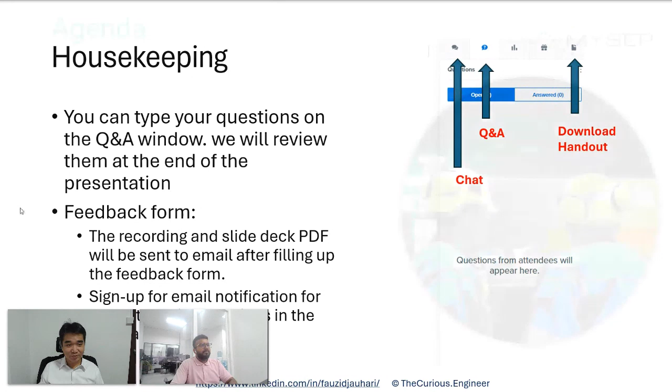Okay. All right. So today's agenda: I will start with a little bit of how you model a separator in HYSYS. Then I will hand over the hard part, the important part, to Avinash.

He will start with talking about the value of rigorous separator modeling using MySep, and how it works, and what you can actually do with the tools, MySep Studio and MySep Engine. So we will demonstrate two workflows.

One is the workflow using MySep Studio by Avinash. So Avinash will demonstrate that part. Then he will pass the file and hand it over to me to show you how to take Avinash's work, the separator information he has done in MySep Studio, and incorporate it in HYSYS. So this is our agenda for tonight.

All right, so this is very brief. In the separator model in HYSYS, you can do a carryover. By default, the carryover model is none, which means it's ideal separation. There's no liquid getting carried in the gas phase. There's no heavy liquid in the light liquid phase carryover and vice versa.

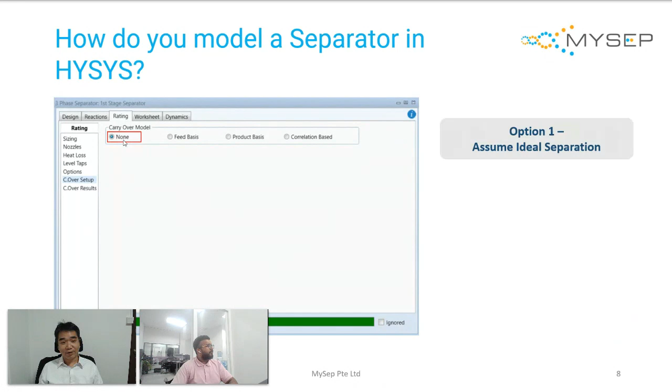So this is the first option. The second option is basically we specify using fractions, how much of the feed is getting carried over. We can use either feed basis or product basis. So this is more for material balance purposes.

This is not predictive. The split or the fractions remain constant regardless of whether the operating conditions change or the flow rate changes. It will not change these fractions. So that's option two.

And option three is basically correlation-based carryover calculations. HYSYS has a few built in. Tonight we're going to talk more about the correlations from MySep.

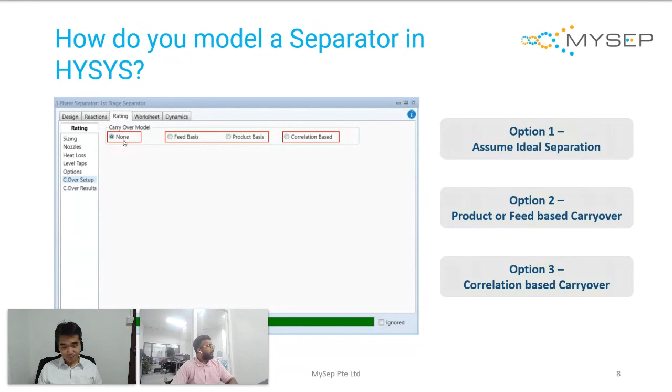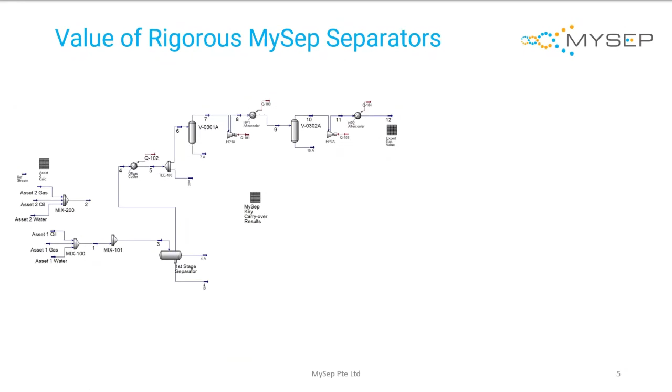All right. So I will hand it over to Avinash. I will stop sharing and take off my video. Cool. Let's get this into presentation mode. Okay. Fauzi, can you confirm if you can see my screen? Fauzi, can you hear me? Yes, I can see your screen. Okay, perfect. Just wanted to make sure everything's okay.

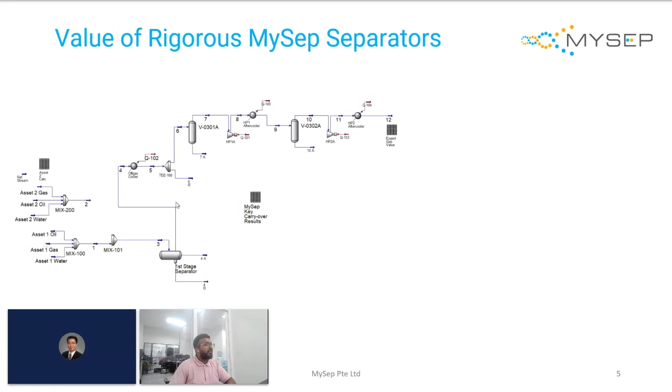Cool. Just picking up from where Fauzi left off. One of the areas where you can use MySep within HYSYS is by integrating the rigorous MySep models within HYSYS. But before we go into the actual workflow, I'd like to explain what rigorous MySep separators are and what they do before we look into the demo itself. Let me just get my laser pointer.

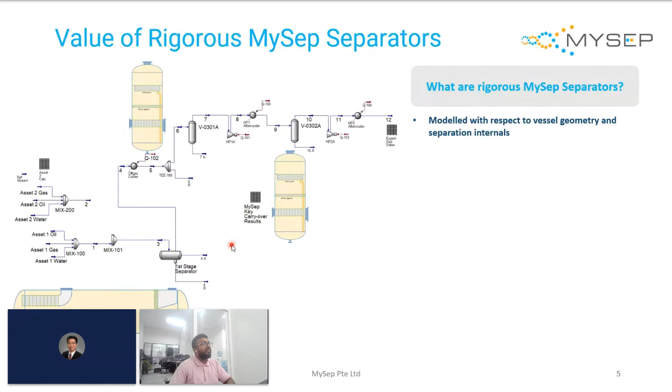This diagram depicts what a rigorous separator would look like. What MySep Studio produces as an output is separation performance. This includes gas-liquid, liquid-liquid, and liquid-solid separation performance. So the MySep software predicts liquid carryover with your gas stream, water and oil content, as well as sand separation.

And as Fauzi mentioned before, the models that we build within the MySep Studio environment can be integrated within HYSYS. This brings the rigorous gas-liquid separation that we have within MySep Studio into the HYSYS flowsheet simulation. So that's a very brief background of what rigorous MySep separators are and what they do.

What would be more interesting to you is what you can now do with this integration. First and foremost, the MySep Engine integration makes your flowsheet simulation more rigorous and more representative of what you see in the field, because ideal separation is far from reality. So having MySep there helps you bridge the gap between what you see in the field and what you see within the simulation environment.

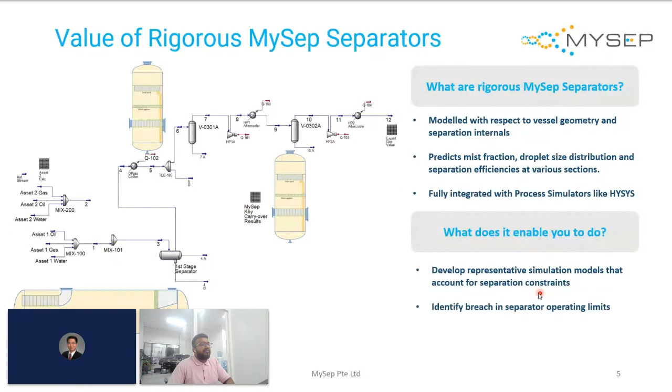So it makes it much more representative. Second is that it does not only bring the gas-liquid separation performance into the flow sheet, but it also tells you what are the limits within your separator. So if you're changing operating conditions, MySep will actively flag what kind of limits are being breached with respect to the separator. So this could be very simple things like inlet momentums, velocities, or it could be things that are very much concerned with the performance of the separator itself. So it will flag things like breaching the demisting device's K-value and things like that. So it will give you an idea whether you're within the safe operating limits or not.

So what can you do with these much more rigorous models? I think it adds way more confidence when you're doing troubleshooting and root cause failure analysis. Once you have a representative model, it becomes much easier for you to do a detailed root cause failure analysis. You can understand whether the performance degradation within your compressors is caused by malfunctioning separators. You can identify whether foaming in your contactors is caused by liquid carryover from upstream separators. So it helps your troubleshooting and root cause failure analysis.

Second, it also helps you do debottlenecking or throughput increase assessments. So this is very useful because with the MySep engine integration, you can understand what are the limits and what are the potential effects to your overall flow sheet when these limits are being reached. And we also see clients using MySep more proactively for things like performance monitoring. So they plot operating envelopes through this integration. And we also see clients linking plant data to actively trend liquid carryover parameters where it may be of interest. So these are just some examples of how MySep is being used and how the integration with HYSYS is adding value to our clients.

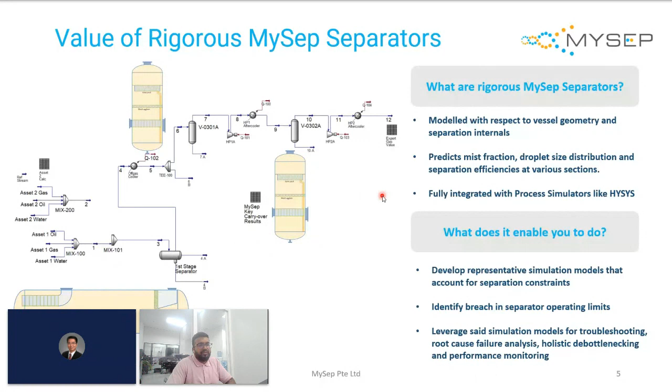So in the first bit, we've spoken a little bit about what MySep rigorous separators are, and how they add value to the overall flowsheet simulation. In the next slide, I'm just going to give you a little bit of an idea of how MySep does the performance prediction. I think this is maybe of interest to all of you. MySep works on a proprietary modeling approach. We call this the MySep incremental modeling. I thought it would be best to explain this to you with an example.

So I have a sample separator here. This is a typical three-phase production separator that you would see in an upstream facility. So I have my upstream piping, I have my inlet device. In this case, I have a vane type inlet device. I have a demisting device here. It's a vane pack demisting device, and I have distribution baffles on my liquid side.

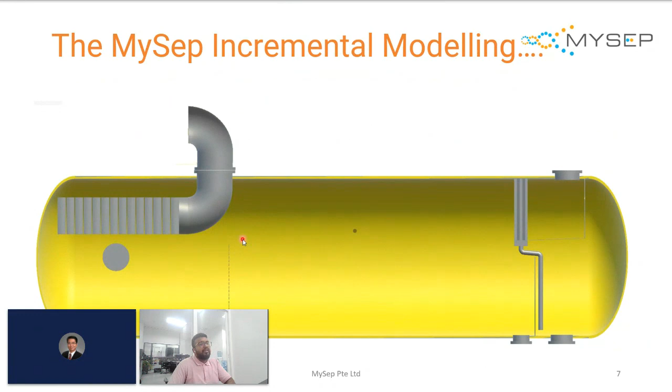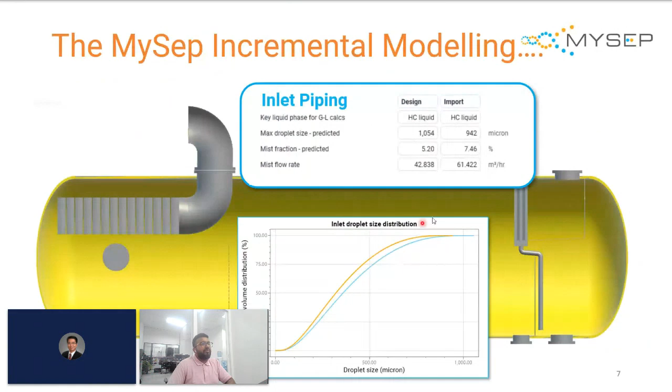So how MySep makes the performance predictions is that it first starts at the inlet piping. MySep will take a look at what goes on within the inlet piping, and it will actively quantify two parameters: the droplet sizes that you're getting into your vessel, and also the amount of liquid that you're entraining in the form of mist. So droplet size distribution and mist fraction is a prediction that MySep makes. This is very important because this determines how easy or how difficult your separation problem is going to be. So that's what MySep defines as a start point within your vessel. This is the first prediction that we get within the MySep environment.

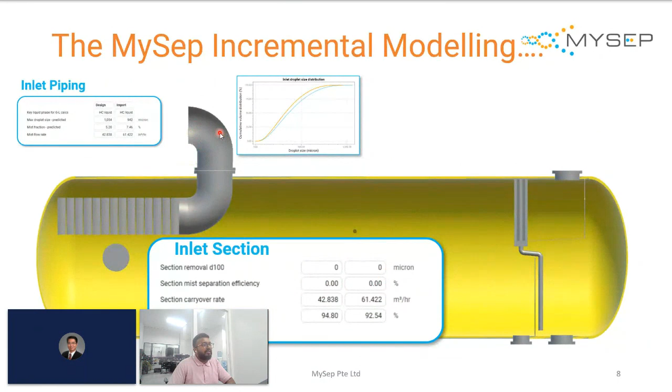And then it takes a look at what goes on within your inlet section. Depending on the type of inlet device that you select, MySep will quantify a mist removal efficiency. In this case, a vane type inlet device does not contribute much to mist separation. So you see that your mist separation is zero. So all of the mist that you generated within the inlet piping will be sent to your gravity section.

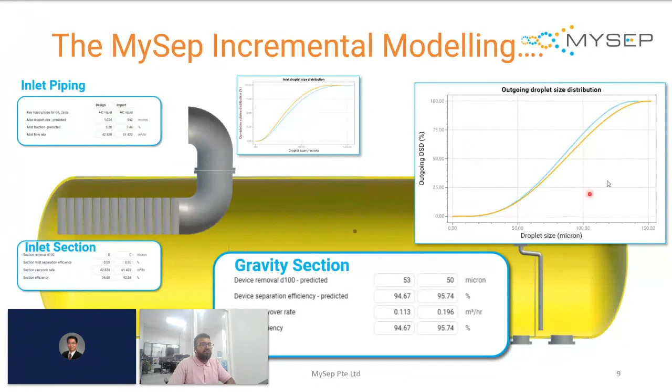So at your gravity section, we'll do another performance computation to figure out what are the droplets that are going to be separated by gravity and what are going to remain entrained to the next stage. So here we'll again define what is the outgoing droplet size distribution. This outgoing droplet size distribution will then serve as an input for your demisting device. So again, iteratively in the demisting section, we will quantify, based on the definition of your demisting device, what are the mist droplets that can be removed.

So I think to put more context to this, what we were getting in were roughly in the range of 1000 microns. In our gravity sections, we were capable of removing droplets of 150 microns or bigger. So anything smaller than 150 microns was carried over to your demisting section. At the demisting section, we were capable of removing droplets of 50 microns.

So in a nutshell, what I wanted to explain is that what MySep does is that it takes a look at each section of the vessel in detail and then incrementally quantifies what is being removed at each section before quantifying the overall separation performance. So that's what MySep does to predict gas liquid separation performance. It does something similar for the liquid liquid bit as well.

So this is just to give you an idea of how MySep works. And I think you will see this once we go into the demonstration itself, and we can take a look at that in further detail.

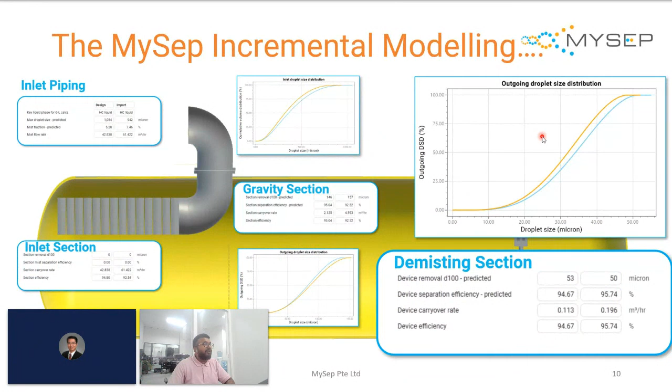So before we jump into the demo itself, like what Fauzi mentioned, we're going to be looking at two things. The first workflow is going to be taking a look at individual separators within the MySep Studio software. And the second approach is going to be taking a look at integrating the various models into HYSYS. So I thought it'd be a good idea to give you an idea of what each of the individual models do so that you have a clearer picture once we go into the demo.

So the first application is called MySep Studio. What you can do within the MySep Studio application is that you can rate and design individual separators. So it lets you take a look at all the detailed sections within the vessel, and it will quantify the vessel performance as what we saw earlier. So in the area of designing a vessel, it has a lot more features. It helps you do automatic vessel sizing. It also computes the vessel weight within the software environment.

If you're on a floating facility, it has capability to quantify motion effects. And if you're integrating into more brownfield operations, it produces an operating envelope. So it tells you at which range, which operating point you'll be suffering from carryover. So it plots the carryover curves. And it also has a lot of other features that help design as well as brownfield works, such as data sheet and report generation. So that's what MySep Studio does.

It helps you build the geometry, it helps you design as well as rate separators that are existing in the field. And it also has bidirectional linking to most of the leading simulators as well as HYSYS. So if you have a separator that you'd like to model, you can pull in the process data into MySep. You can do the performance computations within the MySep environment, and you can write the results back into your flowsheet. So that's what MySep Studio is capable of doing with regards to simulator communications. I'll demonstrate that to you when we go through the demo.

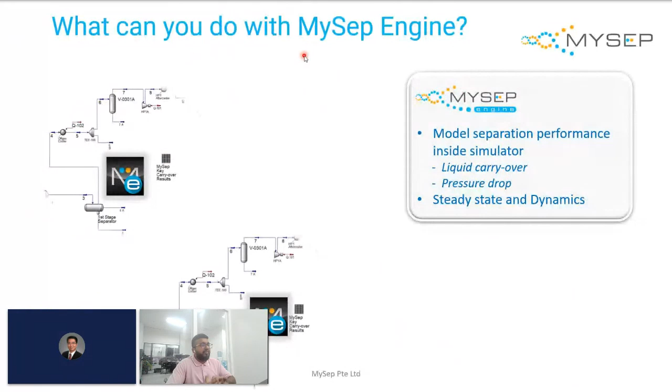But in a nutshell, what you need to remember is that the MySep Studio application is where you model the separator in detail. The second application is called MySep Engine. MySep Engine is pretty much a runtime. And what this runtime engine lets you do is integrate the rigorous model that you built in Studio within the HYSYS simulation environment. So it brings the rigorous gas liquid performance computations within the HYSYS environment.

And whenever you make a change within the HYSYS environment, the separator object no longer uses, like what Fauzi mentioned earlier, the ideal separation or carryover based specification, but it uses the correlations that MySep has built. So this works on both steady state as well as dynamic mode. So that is with respect to MySep Studio and MySep Engine and what they do. I think it'll give you a clearer picture once we go into the demo itself.

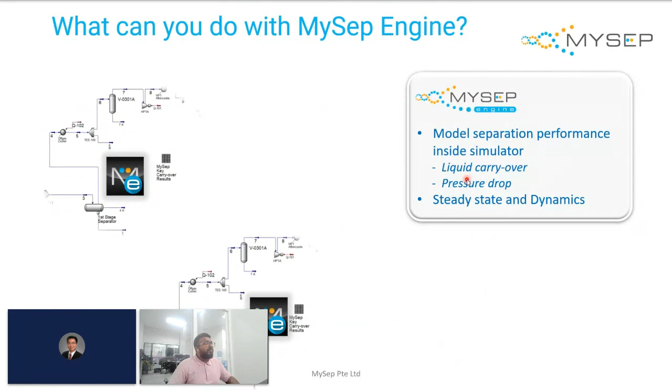So yeah, let's look at the interesting part, the workflow itself. Let me launch my simulations.

Okay, I'll minimize this. Okay. Fauzi, can you just confirm if you can see my HYSYS screen, if everything is coming through well? Yeah, I can see that.

Cool. Okay, in this case, what we're going to be looking at is an existing production facility. What I have here is a typical upstream production facility. I have two assets flowing. I have one asset, one group of wells connected to my facility. One is not. And within this model, what I have is a three-phase production separator.

I call it my first stage separator. I've truncated the condensate as well as the water stabilization system. And what you're seeing here is the gas compression system. So within the gas compression system, I have two suction scrubbers.

So on the first bit, we're going to be looking at modeling the separators rigorously within the MySep Studio application. I'll most likely show you how we'll analyze one of the separators. And on the second bit, we'll take a look at the workflow of having the separators that we've built within Studio integrated within HYSYS. This is where Fauzi would talk to you a little bit more about that integration.

So let me just pull up my MySep Studio application. So this is how MySep Studio looks. Within this MySep Studio model, I have three separators like what we saw earlier. I have my first stage separator, which is a vessel that looks like this.

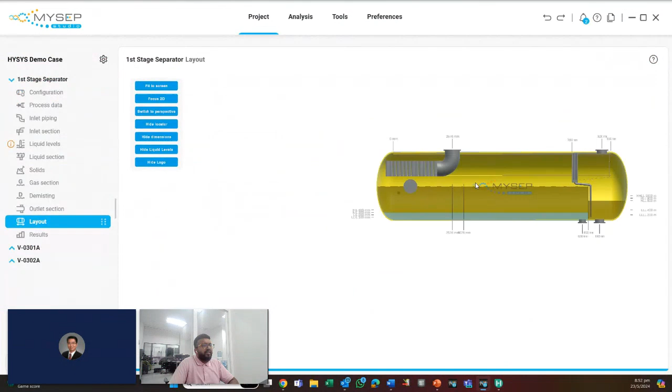What I have within my first stage separator is a vessel that is 9.5 meters in length, 2.8 meters in diameter. It has a vane type inlet device, a vane pack demister, and two distribution baffles on my liquid side. So this is the definition of my first stage separator.

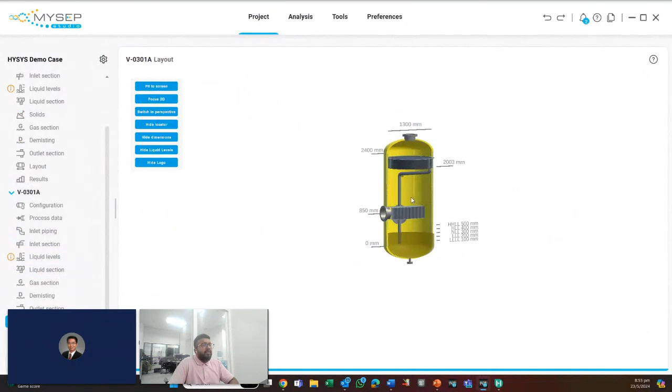Let's just have a quick look at my first stage scrubber. This is how my first stage scrubber looks. I have a vane type inlet device and a vane pack demisting device. And this is how my second stage scrubber looks. It shares a very similar configuration; it just varies in terms of dimensions. So this also has a vane type inlet device and a vane pack demisting device.

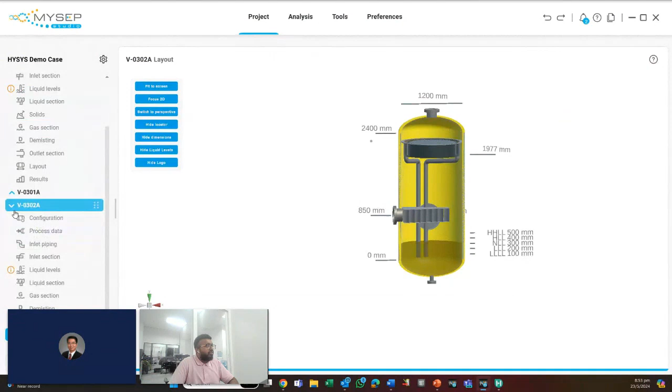What I'm going to do is just walk you through one of the separators. I think the best case would be the production separator, so let's go through that in detail. This is a model that I've already built. I'll walk you through very briefly the model construction methodology, then we'll take a look at the analysis itself.

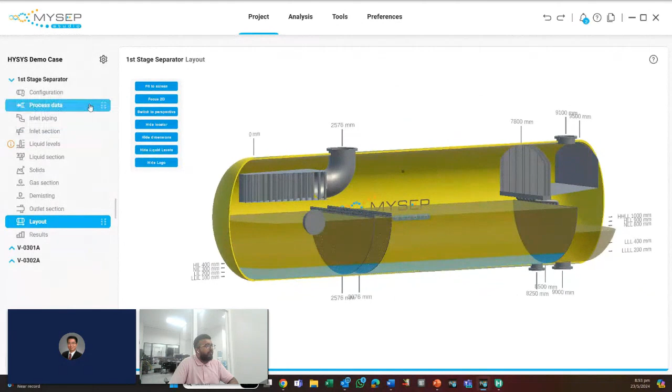For me to reach this point of having this model, I have to go through a couple of steps. Typically, I'll start at the configuration. This is where I define the geometry of the vessel. I choose whether it's a horizontal or vertical vessel, what type of separation it has, whether it's a two-phase or a three-phase separator. In this case, it's a three-phase separator.

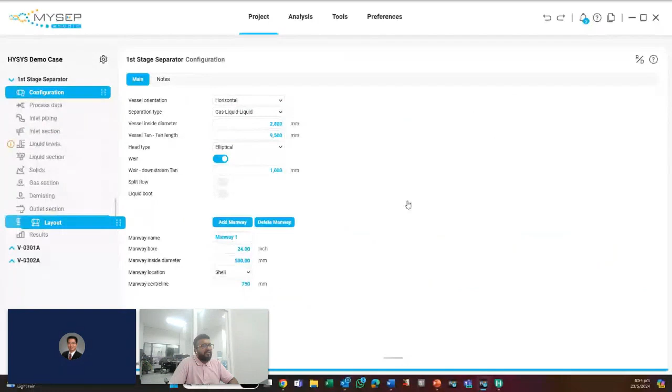I define my vessel dimensions, my diameter and my length, the head type, whether it has a weir, and other configurations such as split flow or liquid boot. Once I go through this, I'll get a definition of my vessel shell. So that is defined, and then I will look into the rest of the sections.

I'll take a look at my inlet piping definition. This is where I define my pipe size and my pipe area. These two parameters are quite important because they impact your droplet size distribution and mist fraction.

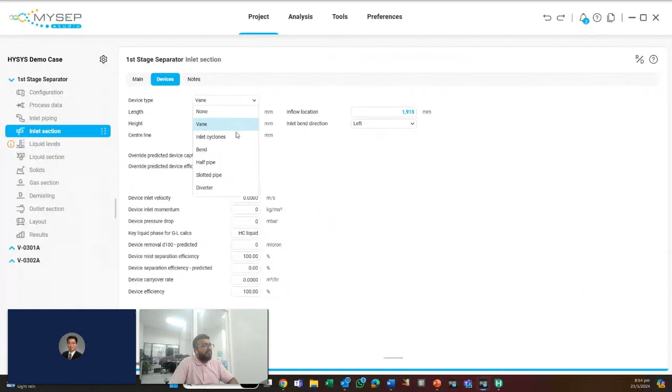At my inlet section is where I select my inlet devices. In this case, I have a vane type inlet device. But in MySep, you can also model different types of inlet devices. You can model cyclones, vanes, half pipes, slotted pipes, or diverters. So all of these are available. This is where I define more details with regards to my inlet device.

Liquid levels is where I specify my set points. In this case, because it's a rating exercise, I've already specified my set points, and MySep will calculate the residence times and the volumes based on the set points that I've defined.

Liquid section is where I define my distribution baffles. If you remember from before, I had two distribution baffles. This is where I specify them, and these are all the parameters in regards to the baffles. I'm going to skip solids.

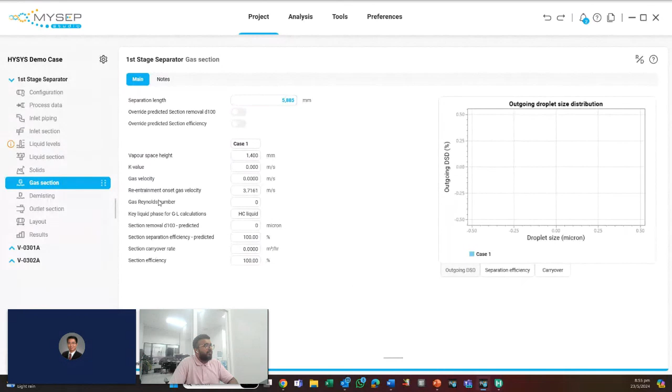Gas section is where I specify my separation length. This impacts the separation performance calculation. So this is something that you need to specify, or if you're in a design case, MySep calculates this for you. And finally, the demisting device, this is where you select whether you have a mesh pad, vane pack, or cyclone. These are the types of things MySep can model.

So once you go through this iterative process, what you'll get is a vessel that looks like this with respect to the internals configuration. So this is a rating workflow. If you're doing a design workflow, it's a bit different.

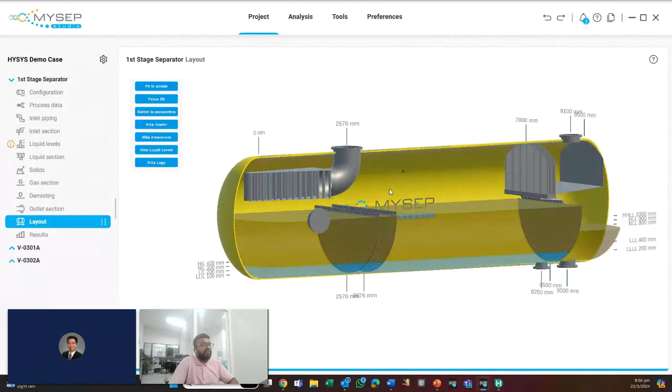Like I said before, you have an auto size feature, and MySep will automatically come up with the dimensions of the vessel once you select the type of internals you'd like to have. So that's sort of the model construction methodology in MySep. I think next we'll take a look at analysis.

So for MySep to do the performance predictions, you need to get some process data in. MySep needs parameters like pressures and temperature, as well as the physical properties for all of the individual phases: the gas, hydrocarbon liquid, and water. There's a few ways you can do this. You can punch these parameters in manually. You can get it in from an Excel or from a simulator.

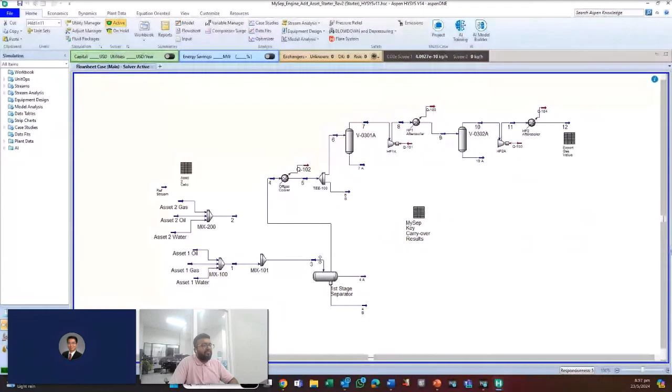So in this case, I'm just going to connect to my HYSYS simulation. Connect to HYSYS. What it will do is pick up the simulation case and identify all the separator unit ops. So I'm just going to pull in my stream data from my first stage separator. Select first stage separator, click case one, get data. What MySep does is it goes into the simulation case, interrogates the stream and gets the stream properties into MySep Studio.

So now if I go back to project and look at my process data, you can see my process data is updated. My production separator is operating at 10 bar gauge. I'm getting roughly 110 million scf of gas coming in. Hydrocarbon liquid is in the range of 68,000 barrels of oil coming in, and I have 25,000 barrels of water coming in. So that is my process condition for the case that is imported.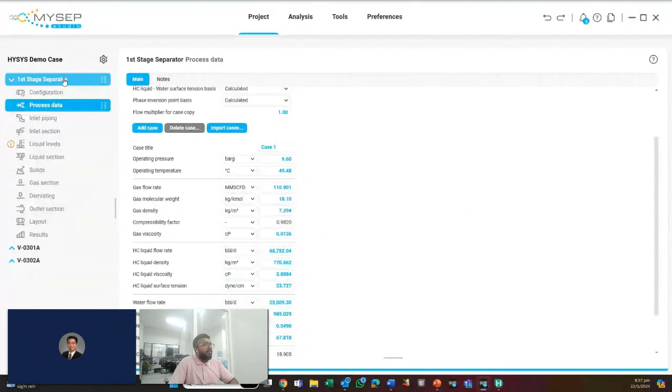So if I click on first stage separator and click on summary, MySep will give me the performance results for this vessel. This is both gas-liquid and liquid-liquid separation performance. Perhaps we'll focus on the gas-liquid bit first.

So what MySep tells me is that for the current operating condition with the current vessel configuration that I have, I can remove droplets of 54 microns or bigger. Anything smaller than 54 microns will be carried over to my subsequent vessel. In absolute numbers, that corresponds to 79.7 liters, in ratios that is 4.56 US gallons per MMSCF. And the vessel separation efficiency is roughly 99%. So that's what MySep tells me on the gas-liquid bit.

On the liquid-liquid bit, MySep quantifies the residence time for both oil and water, and it also quantifies what kind of droplets I can remove both from my water layer as well as my oil layer. So these are the predictions, the results of MySep. But like I explained earlier, it goes through an iterative process to reach this endpoint, so I guess it'd be beneficial to walk through that.

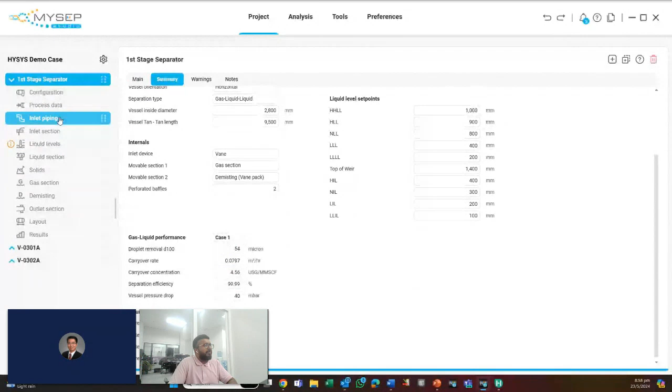So let's take a look at what goes on first within our inlet piping. At my inlet piping, MySep takes a look at my inlet pipe size and my inlet pipe ID, and it quantifies the droplets coming into my vessel. In this case, MySep tells me the biggest mist droplets coming into my vessel are going to be in the range of 1056 microns. So that's going to be the biggest droplets.

I'm also going to get smaller sized mist coming into my vessel. I have 75% of my droplets in the range of 500 microns. So this gives me an idea of what is coming into my vessel. It also quantifies the amount of liquid that is entering as mist. That's roughly 4.5% of liquid in the form of mist, which corresponds to roughly 27 cubic meters of mist coming into my vessel. So this defines my separation problem at first.

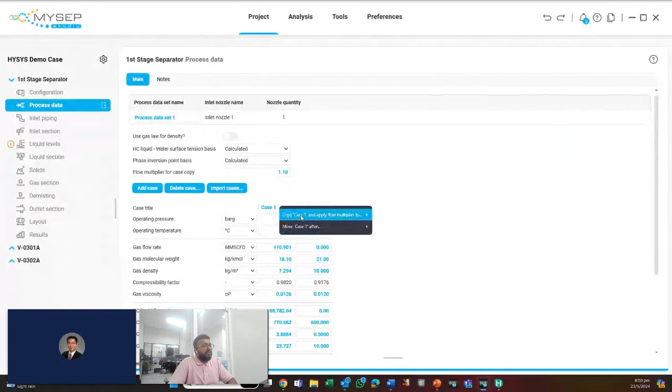Maybe I'll just show you another case for comparison. I will add another case. I'm going to use this neat flow multiplier that MySep has. I'm going to do 110%. What I'm doing is copying case 1 into case 2 with a flow multiplier of 10%. So it increases my gas, liquid, and water flow rate by 10%.

And what I intended to show you is the impact of increasing flow rate by 10%. So by increasing flow rate by 10%, what MySep tells me is that the droplets coming into my vessel are going to be much smaller. I'm going to reduce my droplet size distribution to 950 microns. And my mist fraction goes up by almost twice the amount, so from 4.5% to 7.5%. Mist flow rate goes up from 27 meter cubes to 51 meter cubes.

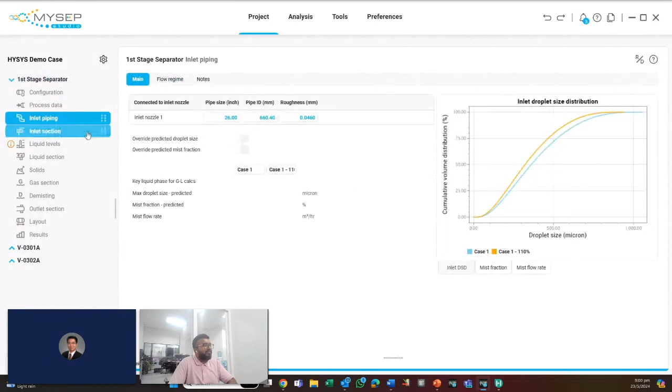So it clearly shows us that for case 1 with 10% more flow rate, separation condition becomes more demanding. It becomes more difficult for the separator to separate gases and liquid. You can also see here that the carryover went up from 4.5 to 9.5 US gallons per MMSCF. So that's something MySep can easily show you for 15 cases. So that's what MySep predicts on the inlet piping section. Let's move on to the inlet section.

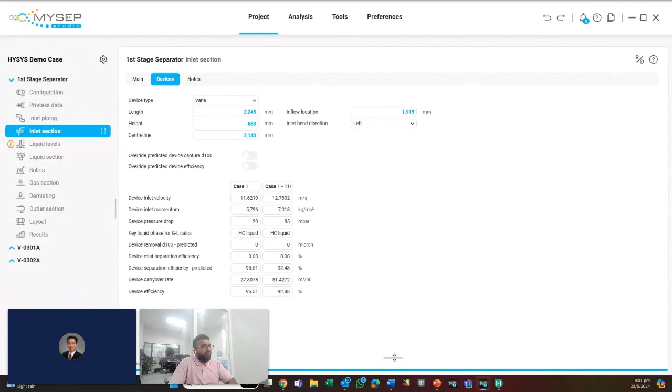So the inlet section, what MySep does is that it takes a look at things like device momentums, and if you're breaching momentums, MySep will flag a warning. So for vane type inlet device in MySep, 9,000 is the limit. So we are still way below the limit, so we're doing good. And here you would actually see the device D100 removal is 0 microns. So in this case, it tells you that this device does not contribute to any mist separation.

So all of the mist that is generated within your inlet piping, 27 meter cubes for case 1 and 51 meter cubes for case 2, the 110% case, is brought over to your gas section. So let's take a look at what goes on within the gas section. Oops, that didn't work out quite well. Okay, maybe I'll put this as inlet piping.

So from our inlet piping, we know this is the droplet size distribution that's coming in. MySep does a computation for my gas section based on my separation length as well as my vapour space heights and velocities. It tells me for case 1, I can remove droplets of 150 microns. For case 2, which is the 110% case, I can remove droplets of 164 microns. So any droplets bigger than this will be removed by gravity. Any droplets that are smaller than this will be carried over to the next section, which is my demisting section.

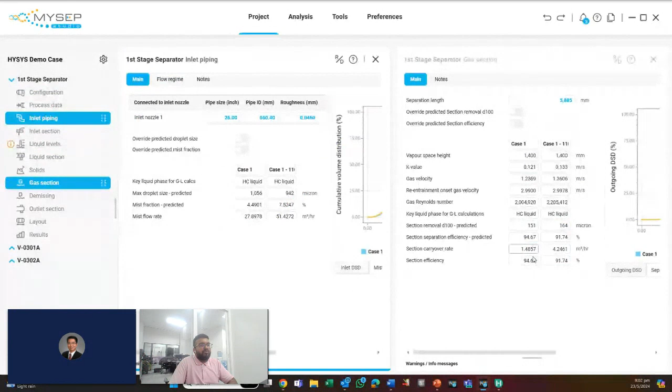So this gravity section contributes to roughly 91 or 95% of separation efficiency. So 95% out of what we had here, 27 meter cubes, will be separated. The remaining 5% will be carried over to my demisting section. So 1.4 meter cubes will be the inlet to my demisting section. So here MySep also graphically represents the outgoing droplet size distribution. So 150 microns will serve as the inlet for the demisting section. So now let's take a look at what goes on within the demisting section.

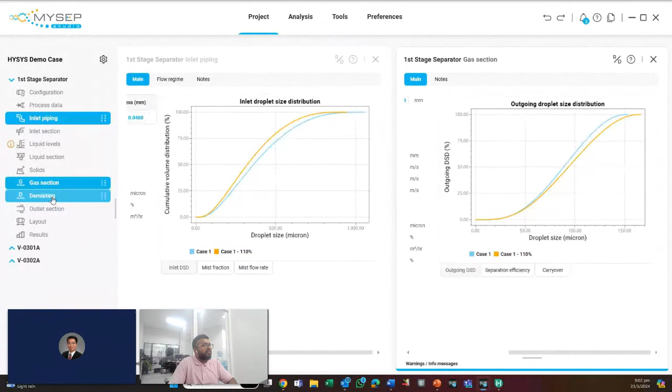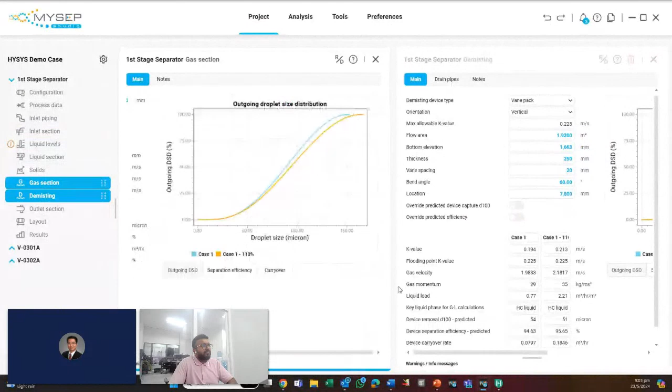So the demisting section, let's put my gas section here. So at the demisting section, I have a vane pack. This is the flow area of the vane pack that I have defined, and these are other parameters with regards to the vane pack. So MySep will compute the operating K value, and it also identifies the flooding point K value. So if you're breaching this limit, your separation efficiency might reduce. So in this case, we are still within the flooding point K value limit.

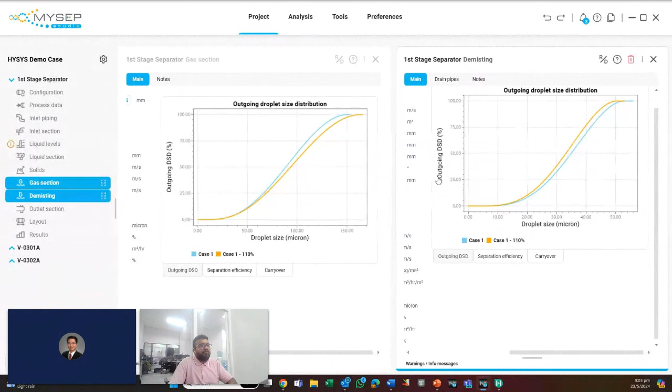And MySep tells me that I can remove droplets that range from 51 microns to 54 microns between case 1 and 2. So from the 150 microns that was coming in, I can remove droplets of 50 microns. So all of this section is removed. Anything below this, which is going to be the outgoing droplet size, will be carried over. So that's how we quantified the separation performance that we saw earlier. 54 microns for case 1, 51 microns for case 2. That's with regards to droplet size.

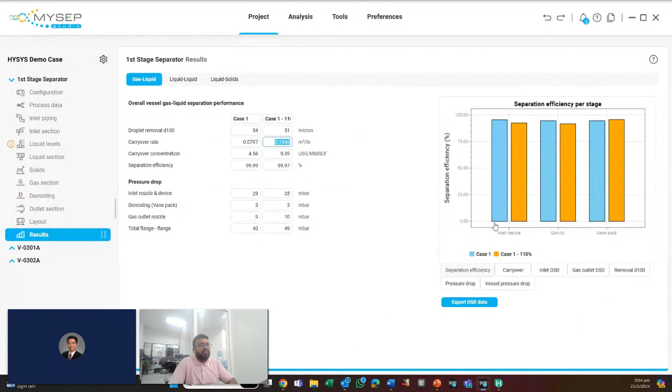It also quantifies what is the carryover rate in absolute numbers and in ratios. Here, MySep also gives you graphically the results, the separation efficiency, the carryover per stage, how much carryover from individual stages, the droplet size distribution as you saw earlier. So that's what MySep does in a nutshell with regards to the gas liquid separation.

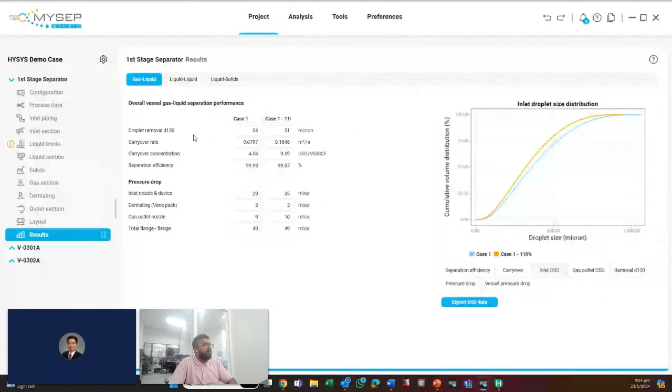I'm going to push on and show you how MySep handles the liquid-liquid separation bit. So earlier we had a brief look at the liquid levels. So the liquid levels here, they will contribute to two things. It will contribute to the control residence time.

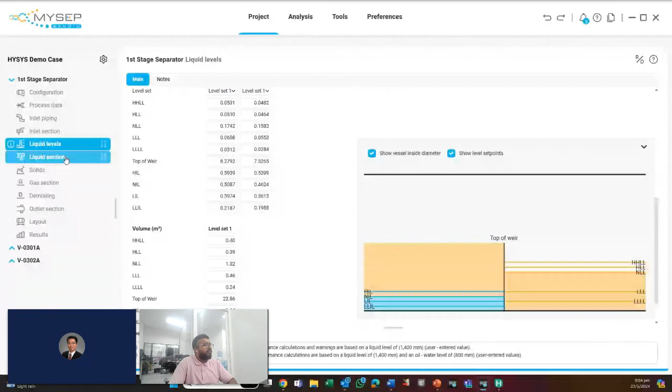So this is computed between each level as well as the volumes. This will then be used for the liquid-liquid separation performance. So here at the liquid section, this is what we saw earlier. This is the definition of the baffles. But here you can actually see the degassing efficiencies. So MySep will quantify what is the water and the hydrocarbon liquid degassing efficiencies.

And if you go into the liquid section, MySep will take a look at the separation length for both your hydrocarbon liquid as well as your water layer. And it will quantify what kind of water droplets and what kind of oil droplets you can remove. So in this case, let's just focus on case one. For case one, we have a residence time of roughly 2 minutes. And with that residence time, we can remove droplets of 577 microns.

For my water layer, I have a much bigger residence time. I have roughly 4.67 minutes, and that helps me remove much smaller droplets. I can remove droplets of 177 microns. So that's what MySep does in the liquid bit. It also does something more detailed. When you look into the detailed liquid section, what MySep will do is that it will quantify the droplet sizes.

So in this case, what MySep is telling me is that the dispersed phase droplets that enter my vessel are in the range of 1,500 microns. Because my vessel is hydrocarbon liquid continuous, this is the size of the water droplets that are coming into my vessel. So the size of the water droplet coming into my vessel is 1,526 microns.

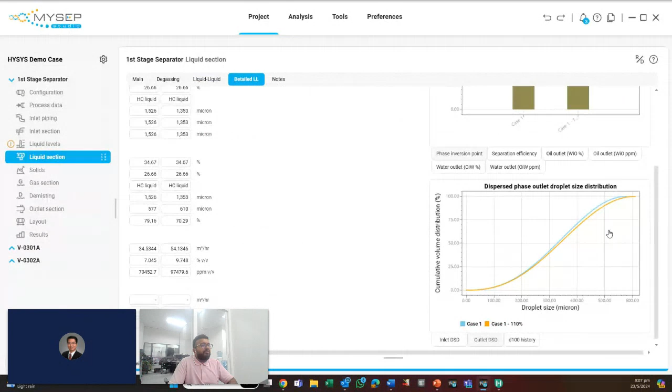So that's what MySep can do with respect to detailed liquid separation. It will quantify both in terms of absolute numbers, in terms of carryover, as well as ratios and ppm levels. So here you can see what is coming into our vessel. For the first case, 1,500 microns were coming in, and we were able to separate droplets of 577 microns or bigger. So the remaining amount will be the water that's going to be carried over in my hydrocarbon liquid outlet. So that's what MySep does with respect to liquid separation.

Avinash? Yep. Go ahead. There's a question related to this liquid from Muhammad Umar. Okay, let me take a look at the questions. Yep, I can read it to you. Okay, go ahead.

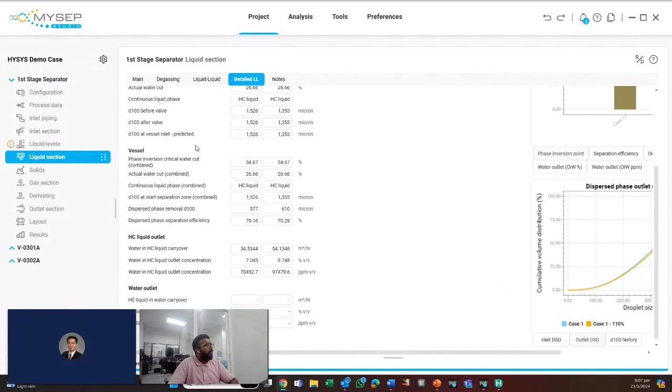Can it predict liquid-in-liquid carryover with the same accuracy you can do liquid in vapor? I guess it's asking whether the liquid separation carryover calculations have the same accuracy as the liquid in gas or vapor calculation. Yep. So MySep assumes that you have even flow distribution in the piping. It will use that assumption, take a look at your process condition, and quantify what you have coming into your vessel. So if you have good flow distribution in upstream piping, this is what your droplet sizes will be.

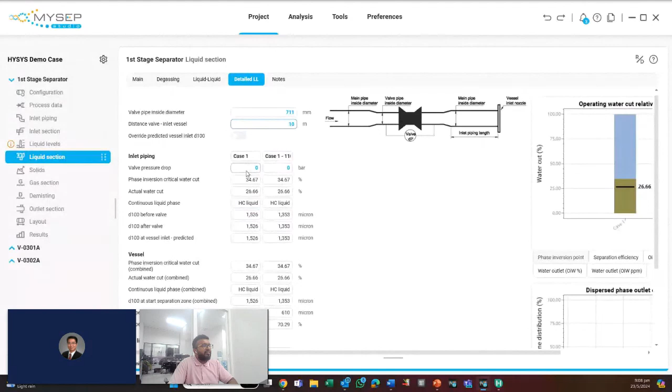But for example, if you have flow restriction devices upstream, so in this case, if I have a valve, I can represent the valve and MySep will account for the disturbance that the valve will introduce. This is a very quick demo. The valve is located 10 meters upstream. And if the valve has a pressure drop of 1 bar, we can see that the valve actually shears the droplets into much smaller droplets. And you will see that MySep uses the new droplet size distribution for the predictions.

And you can see that the separation performance reduces because of the changes in the droplet size distribution. So yes, it can account for things that are upstream of the vessel in terms of flow disturbances.

All right, thank you.

Yep. Fauzi, any other questions that we need to address? I think the rest we can address it later. It's okay. Yeah. Okay. Perfect.

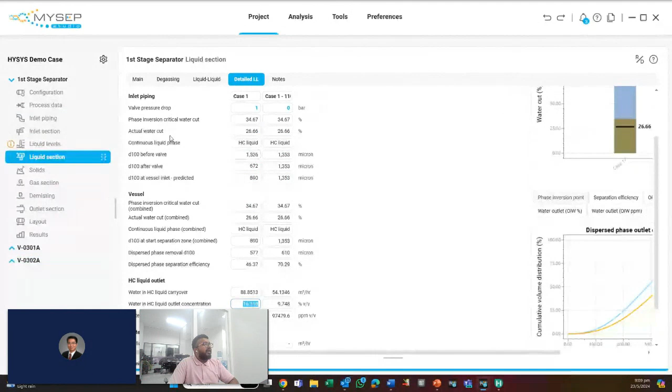I think in a nutshell, if we want to cover how MySep does the predictions, I think that's pretty much what I've showed you. There's a lot more things that MySep can do, but I think we'll save that for another day. So to summarize what we've seen so far is that we've seen how MySep will handle the gas liquid separation performance, how it incrementally quantifies what comes into the vessel, what gets separated at the inlet section, gravity section, as well as the demister section for quantifying the overall vessel performance. We've also looked at the same for the liquid-liquid separation section.

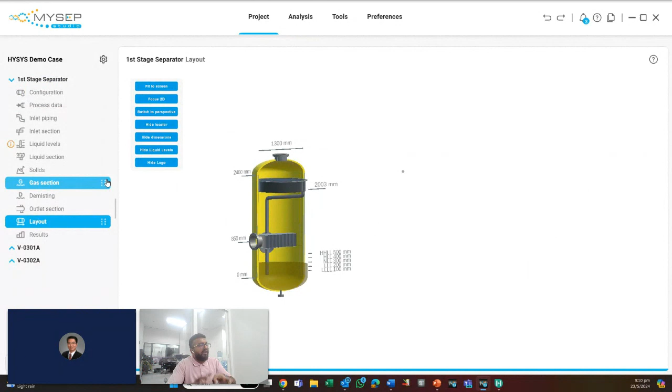So in the next bit, I think what Fauzi and I intend to cover is how do you actually integrate this model into HYSYS or into a process simulator. So for that, what you need to do is export the geometries that you've built, which means I need to export the definitions that I've made within my MySep Studio model into a file that can be consumed by HYSYS. So that is done in a very simple step.

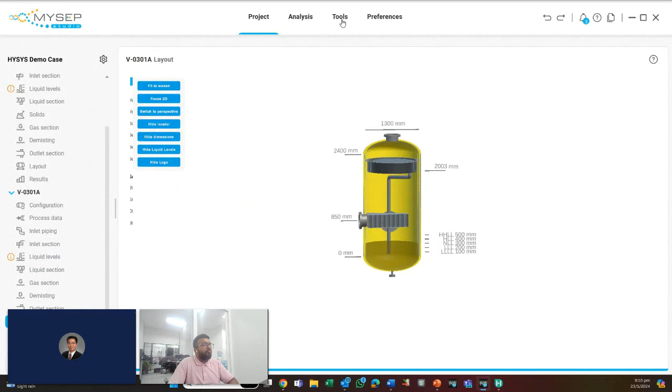If I go to Tools, if I go to Simulator Communications, remember this is where I got my process data in, I would actually see that I can generate something called an engine geometry file. So I need to generate this file, which will serve as an input to my HYSYS simulation case. So I hit on generate, it will generate something called an MYG file. This MYG file is pretty much a definition of the vessel, the dimensions, your internals definition, what kind of internals you have, what are the parameters of the internals. All of this are packaged in a format where HYSYS can read and HYSYS can use it to predict performance.

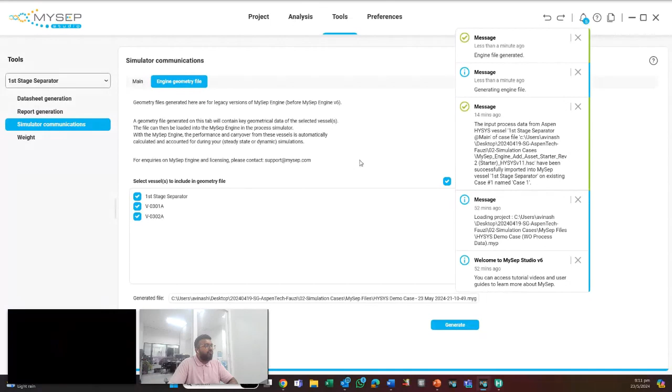So this will then serve as an input for the HYSYS simulation and for the MySep engine extension to work within HYSYS. With that, I think I will pass it over back to you, Fauzi, for you to show how we can use this geometry file and integrate the model within HYSYS. So over to you, Fauzi. Right. Thank you. Give me one sec. Let me share my screen.

All right. Okay. Yep. So I'm using the same file as what Avinash is using, right? And we have here the file which was already exported by Avinash using the MySep Studio. This file contains the information of the geometry of each of the separators in this facility, right? So how do we bring that? Just to step back also, why we want to do this? Because sometimes we actually want to predict the actual performance of equipment. In this case, a separator, right?

Last time we talked about heat exchangers, how we incorporate heat exchanger geometry. Now, basically, we are incorporating the geometry of the separator. By modeling that, we will know what's the impact to the other equipment, to the downstream equipment, the performance. So how we bring that? So I'm bringing my palette. I can search MySep here. There's MySep. I can put this, let's say here. I can name it, let's say, separators. I'm going to bring the geometry files. This is the geometry files.

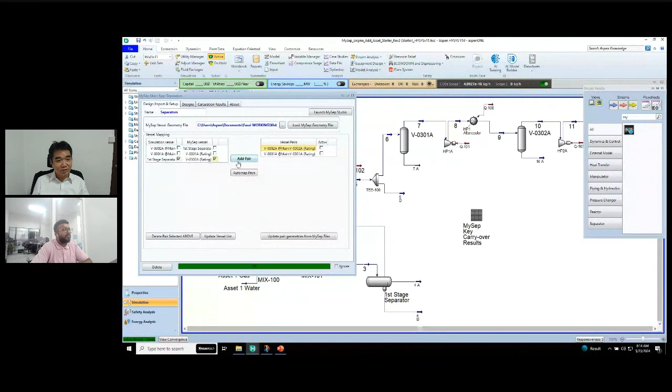Okay, so you can see here on the left is basically listing all the separator unit operations in my HYSYS file. There are three, and Avinash already created three geometry details also in this file. So what we need to do next is basically match this to the mapping. So this unit operation will take this geometry file. Then same with this, and next is this. Okay.

So you can see here currently the carryover model is using none, the kind of ideal separation. Now we're going to activate the correlations from MySep. So this is the first stage separator. If I activate this, it will shift to this correlation base. Now it's using the MySep carryover.

So we can view, for example, here in the design tab, the information of the geometry which has been defined by Avinash: the inlet piping, the diameters, the length, the type of the inlet device, including input for the level set points. In the calculation results, you can also see, since I've activated one, we have here the separations for the inlet piping, inlet device, the gravity sections, and the demisters. So I will activate now the rest of the calculations for the other two.

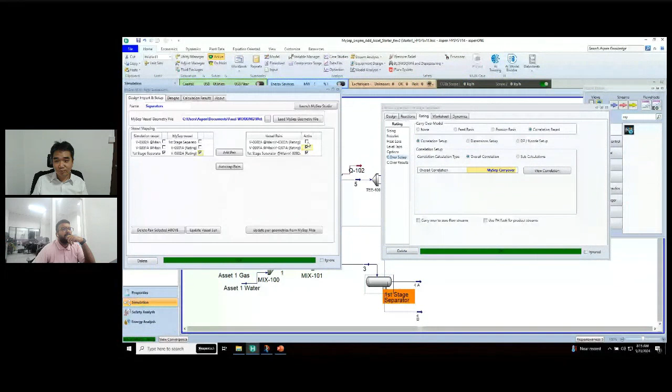Okay, so for the carryover, you can also go to the individual separator here. You can click the correlations. The same here, you can see the results, right? Same. And if there's any warning, it will actually present it in this, right?

You can see what warning, right? What type of warning is there, right? Okay. Same here. Right. Okay. So next,

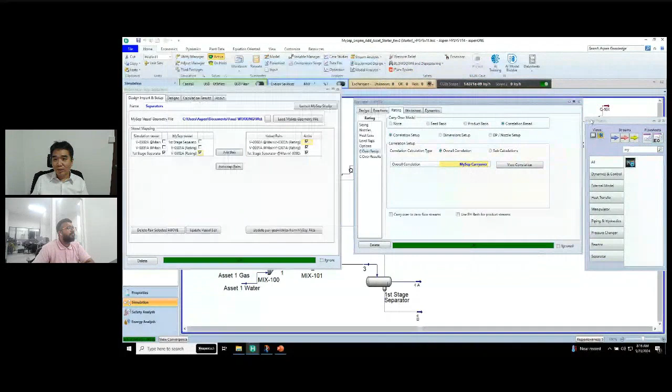basically, production sometimes changes, right? So sometimes you might need to bring an additional well to the facility, right? To increase the production or to make up some production on the other facility, right? Or even sometimes we want to connect, right? For example, there's a nearby well you're exploring.

Now we need to check whether we can handle the additional well fluid, right? How is the impact to the unit operations from this additional well fluid? So we have this additional well fluid from asset 2. We're going to connect it, right? So here is the summary of the current state. I think I've captured that here. Let me check. Right now I can capture.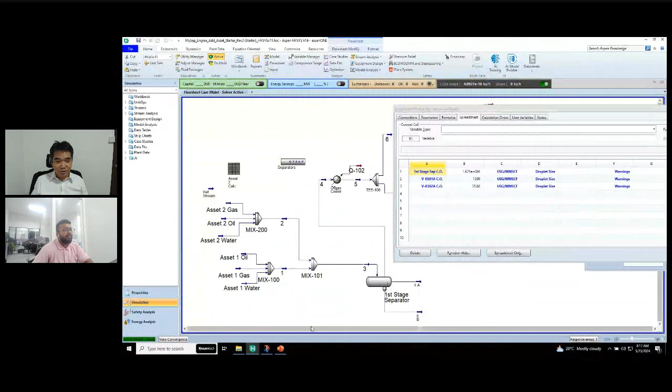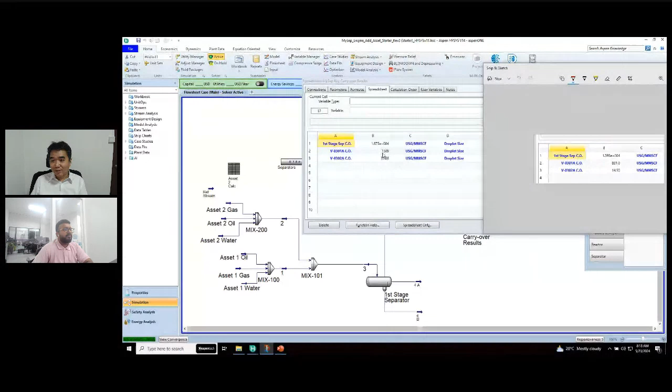All right. So now let's say we connect this, right? You can see now it will calculate based on the separations, based on the correlations, what's the impact on the different separators. So essentially the load increases, right? So you can see the carryover, all of it will increase, right?

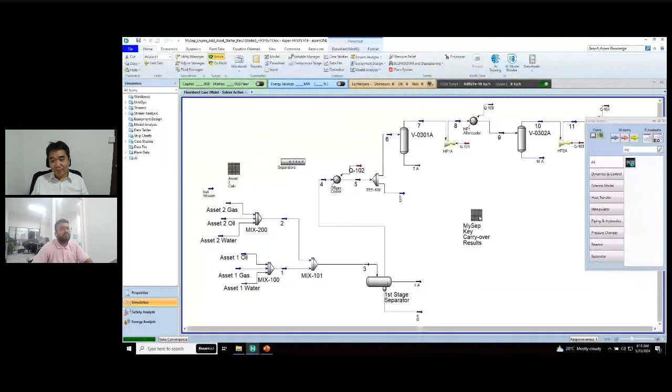Okay, of course we can also do a case study if you want, like a sensitivity study of this well fluid, varying a certain flow rate of the gas, for example, and see the impact on the carryover and the droplet size, right? We can do that. So let me map this first. For example, the droplet size of this first separator.

So let's say which one? Yeah, you can take a look at the demister one. Perhaps that would be the most representative one. The demister one, yeah? Yep. So that's the droplets that the vessel can remove.

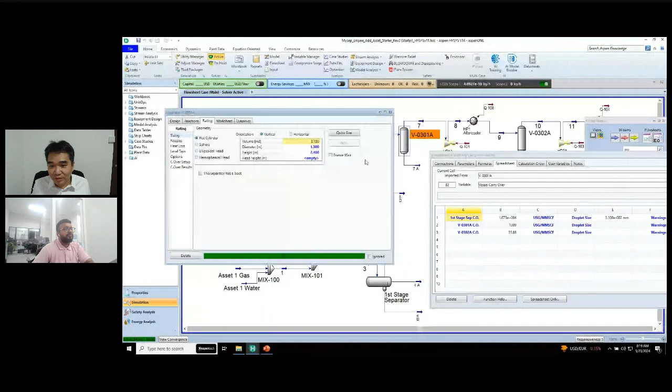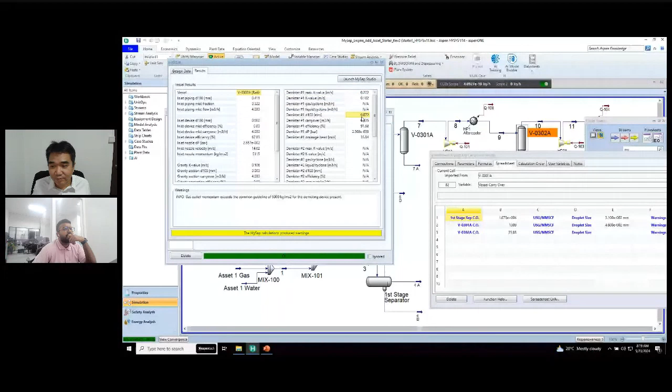Separator, right? So I can drag and drop it here. Then I can do the same for this. This is 301. Okay, this one. Then I can do the same for here. Okay. So I'm going to connect that. I will leave the warning, it's okay. So I can do a case study here.

I can go to case study. I think Alvina has set up something. So this is the varying variable, the independent, and the dependent variable. I can just drag this. This is all the carryover values. And this is the droplet size. Okay, so I can set up this.

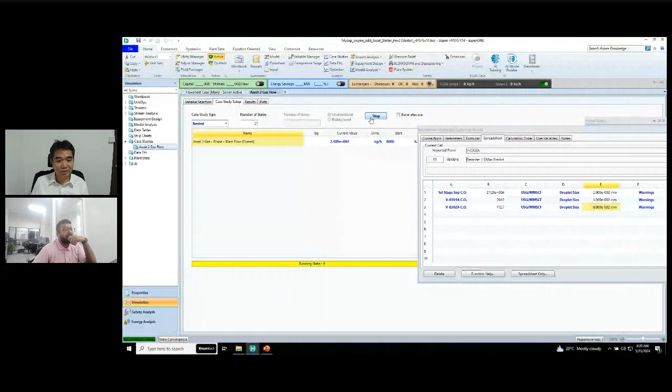It has been set up from 8,000 to 60,000, increment of 2,000 kilograms per hour. Then I can run this case study. So I can go to the results. Probably I will transpose this. So for different flow rates, this is my first separator, suction scrubber, LP suction scrubber, MP carryover, and these are the diameters, so the droplet size.

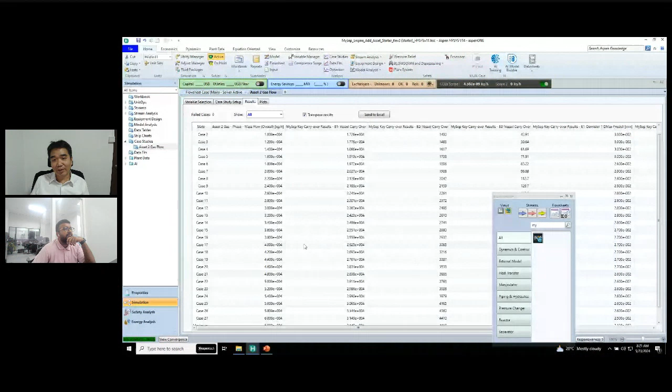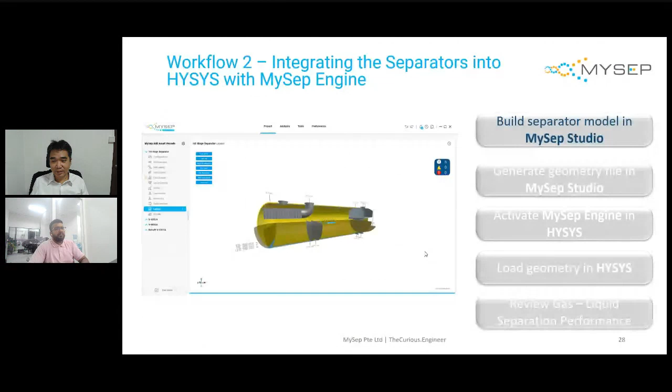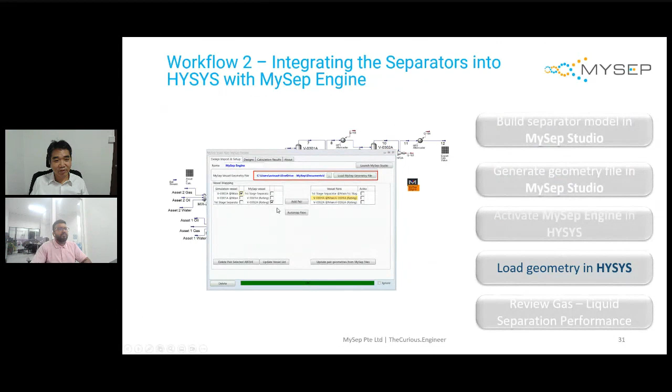So we can take a look at what increase in flow rate we can tolerate depending on the criteria. So that's the case study. Let me go back to the slide. Let me make sure that I've covered everything. We've talked about generating the files and switching on the MySep carryover correlations. We load the geometry files, do the mapping, and activate the correlations. Then we can get the calculations.

Calculation result. The other thing I want to highlight is this can definitely be used for designing your separator, or troubleshooting and assessing your separator performance. We can also use this for performance monitoring, equipment monitoring. In the sense that, for example, there's no instrumentation to actually measure your carryover, but this value is calculated by the model.

And this value probably gives you indications whether there's going to be an issue, let's say, to your downstream equipment, to your compressors, right? So you can actually bring your data, for example, from your historian with the flow rate, etc., right? You can send it to HYSYS.

HYSYS, with the MySep engine, will calculate the droplet size, the carryover, and actually it can write back to your historian, and it can display that in a dashboard in real time, right? So that it can actually give an alert to the operators, to give you indications. So this is something you can provide or develop, especially for operating companies, to have equipment or separation monitoring, right?

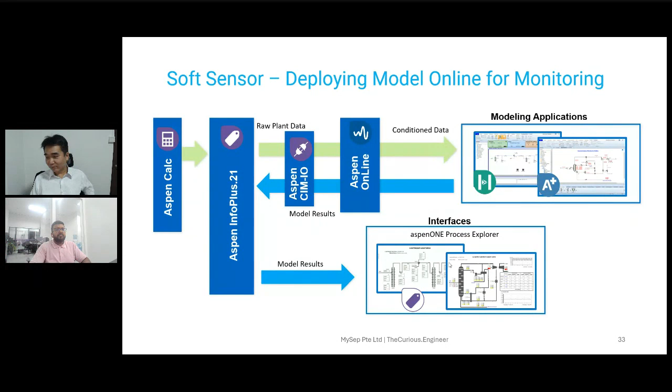Okay, I think that's about it. Maybe you want to cover this quickly. Yeah, so I think we have. Sure. Yeah, go ahead, Fauzi.

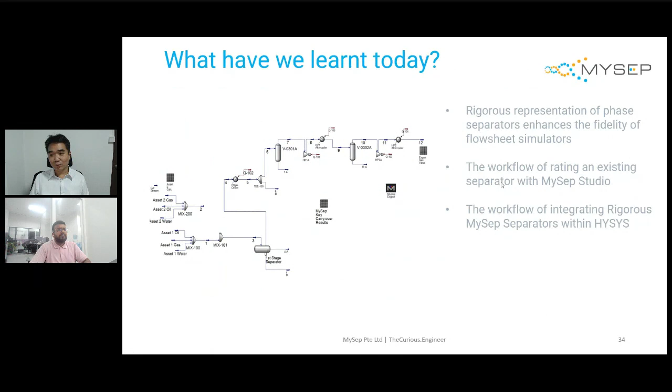Yeah, I think we have covered how to build the rigorous separator model, including the dimensions, the different inlet devices, the outlet devices, right? To incorporate that, the rating workflow in MySep Studio, as well as how to incorporate those details back into HYSYS, right? Okay.

All right, so let's go through some questions and answers. Yeah, let's do that. Right. So let me go from. I think some of that.

Okay. One is this question from Mohammed Yasser about correlations. What kind of correlation is used for the separator sizing calculations in MySep? Yeah, that's a very good question. So what we use in MySep is correlations that we have tested and validated in our very own lab. We have a lab in the Netherlands where we test a lot of different types of internals and demisting devices, and we use the results to develop our very own correlations. So all the correlations in MySep are proprietary, developed based on extensive R&D. I think we can definitely discuss that on a separate occasion.

All right. So there's a question from Mahdi. I'm not sure what the question is. It's basically an L over D ratio. I think this is kind of the rating. Yeah, it could be a rating parameter, or it looks more like a sizing calculation. If you're doing a sizing exercise, yes, you can definitely specify all of this and size based on the criteria that Mahdi has defined. So yeah, definitely doable.

Next, Nika Dui: can MySep in the HYSYS flowsheet simulate an inlet stream with surge flow? Hi, Nika. Nice to see you here. I think if you're looking at a slug arrival or a surge case, definitely it will be possible if you have a dynamic simulation model in HYSYS that is linked to a pipeline simulator. You can take a look at the slug arrival and the impact on separation by using a HYSYS dynamic model together with the MySep engine. So that is doable. Don't know, Fauzi, if you want to add something.